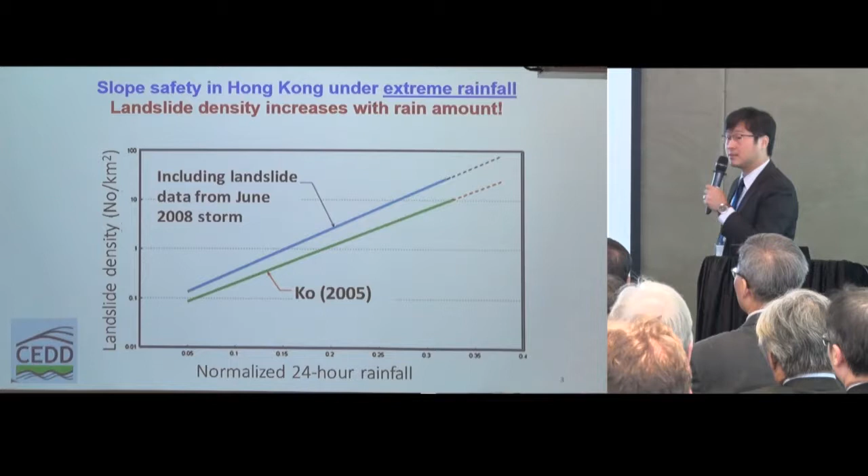So from the previous presentation from the climate researchers, we know rainfall is going to be increasing in the future. So what does that mean to us? Landslide density will be increasing. That's the statistics provided by our colleagues in the Geotechnical Engineering Office in CEDD. So that's the prediction. And we also have academics in HKUST doing the prediction of what happens under the climate change scenarios. And this is the western part of Hong Kong Island.

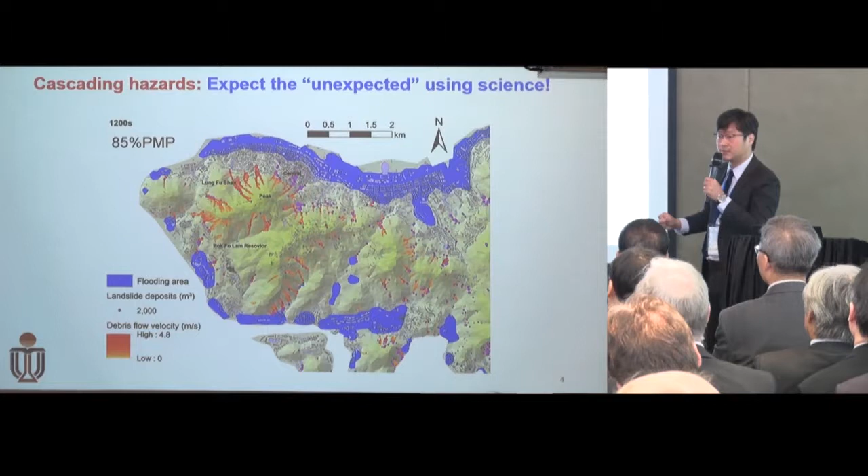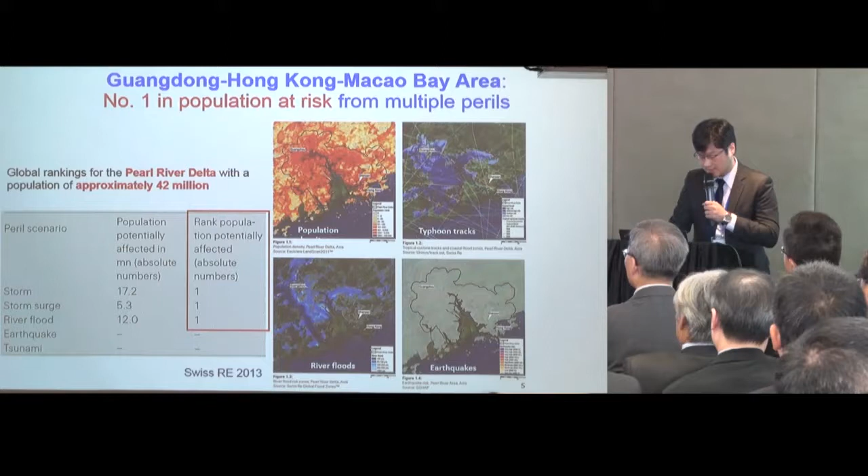As you can see, these little tails here are representing the debris flow events under some sort of climate change scenario. So we don't only have the landslide events, but also flooding. As you can see, the blue areas are the potential flooding areas in our future. So that is not only happening in Hong Kong, but also in the Guangdong, Hong Kong, Macau Bay Area. So from the statistics from our insurers, Swiss Re, they show that this is the #1 risk population in this area with storm surge, and also the flood. So that is not only happening in Hong Kong, but in the Greater Bay Area as well.

So we also have colleagues from the Drainage Services Department sharing their current technology in Hong Kong. So they have a very innovative approach. They are trying to build a sponge city, by building this kind of blue-green infrastructure to adapt to that kind of climate change future regarding flooding through different mechanisms, as you can see, okay?

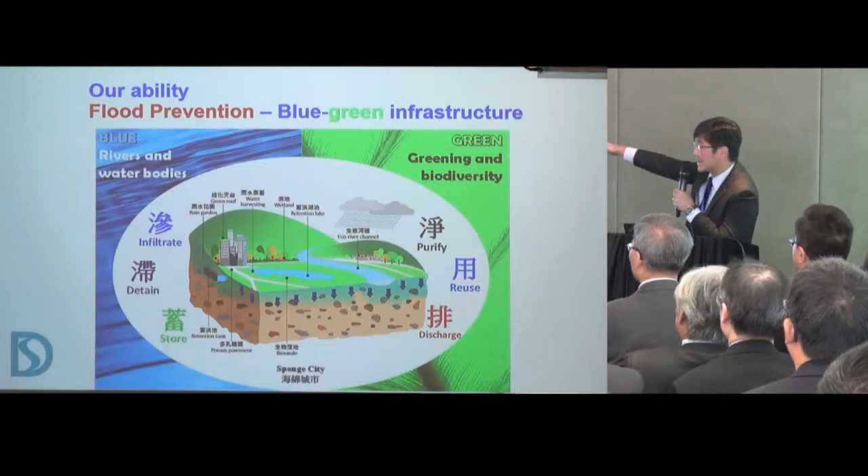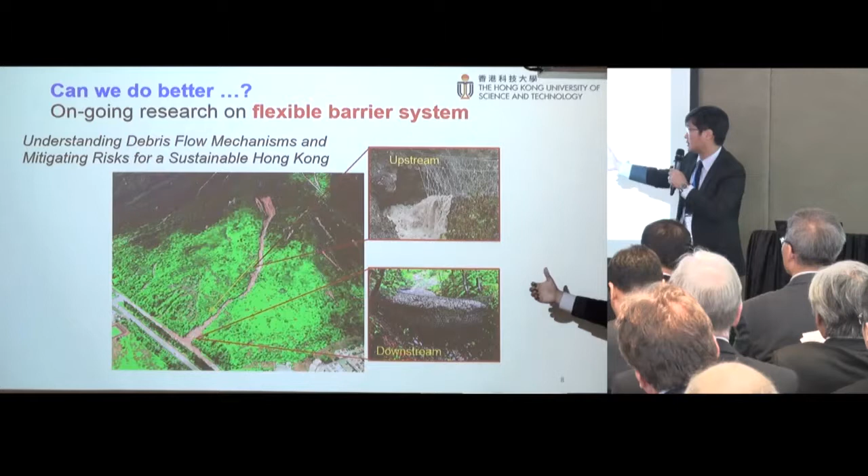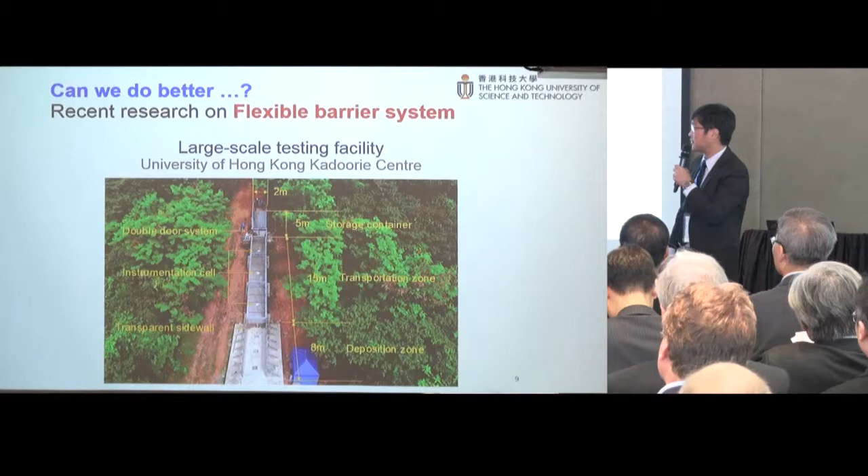So can we do better? Those are the existing technologies. So we have ongoing research on developing more adaptive infrastructure for landslides. So this is one technology, they call it a flexible barrier system. So basically it's steel wire to collect the debris. So the HKUST colleagues have built a long flume. By collaborating with the University of Hong Kong Kadoorie Centre, they built a around 30-meter long flume.

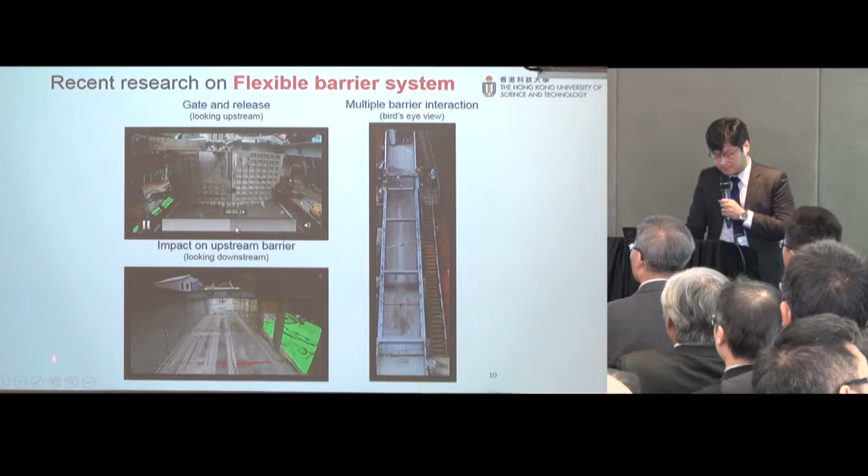So what they did is, here I show you some video. So that is a video looking upstream. So basically we collect the debris and then we open the gate, and then where is it? Okay, so no, not this one first. Look at that one. So debris coming down. So if you look downstream, you then see the debris going through. So you see the piling up of the debris because of the flexible barrier.

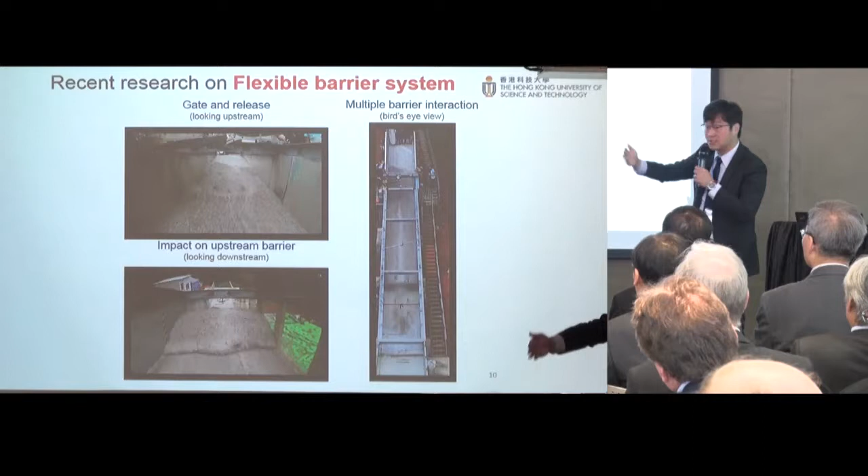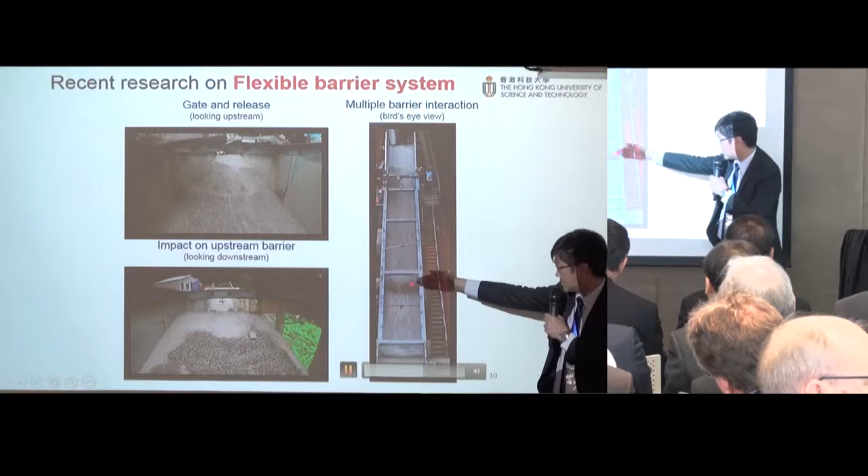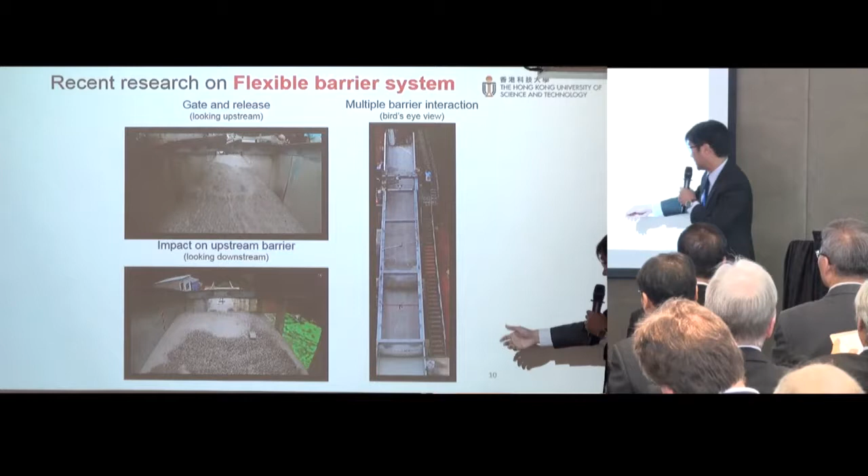And if you look at the right-hand side here, the debris is coming down, and we have one layer of flexible barrier, another one. So if you can see here, we are trying to minimize this runout distance, which is very important because in Hong Kong, we are very densely populated. The infrastructure is very close to hills. So if we can minimize this runout distance, then we can save lots of lives. So this barrier system seems to work quite well, and that's the recent research.

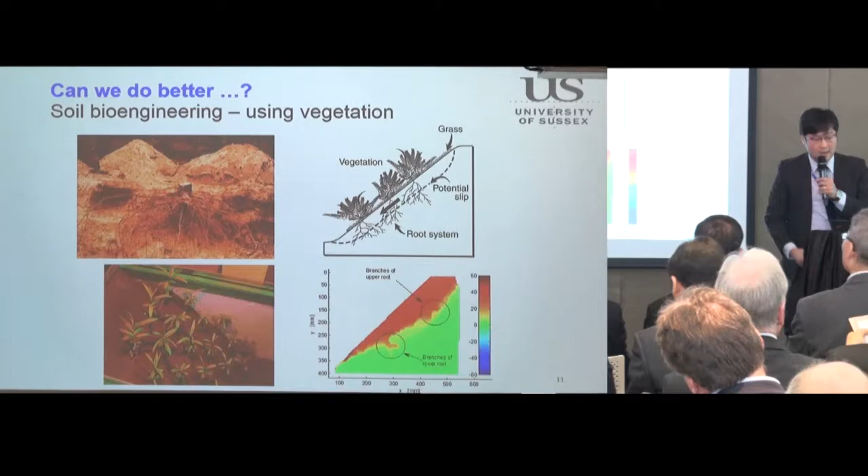And we also have speakers from overseas, in the UK in particular, from the University of Sussex, which is Professor Michael Davies' work, who is in the audience here. So he has a very innovative, ecologically friendly approach to stabilize slopes using vegetation. So these are the root systems. So why don't we utilize these roots as engineering materials or engineering structures to stabilize the slope? So this is one thing we could probably learn from overseas.

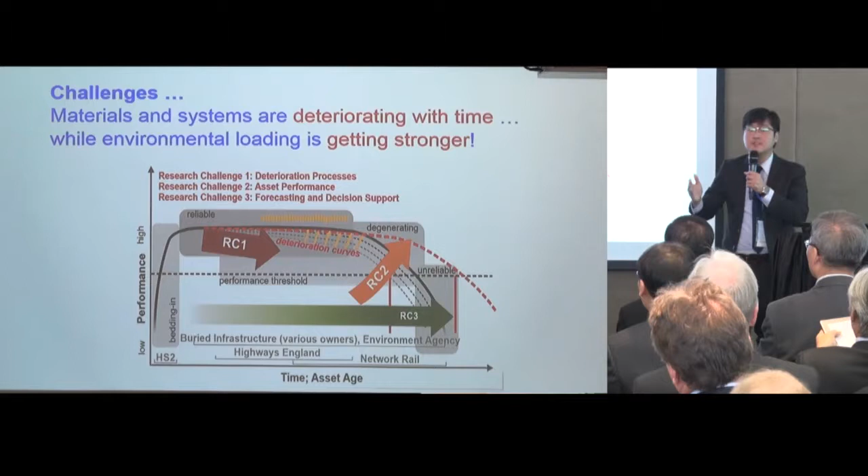So the challenge is that materials and systems are deteriorating with time. So even though we build something new today, the performance increases. But as time goes, perhaps due to environmental loading because of climate change, things deteriorate. Okay, so it may drop below the performance level. So what does that mean? So even if we build a very perfect system today, after 50 years the system may deteriorate, just like your photocopier in your office. If you utilize it a lot, it deteriorates, then you need to replace it. So what does that mean?

So for the increased rainfall, we have challenges. We need to improve our adaptive systems for this kind of event. So it's quite challenging in terms of research to predict where and when failure will happen with time. So this requires a lot of research in understanding the interaction between climate, soil, and possibly also vegetation. So it's cross-disciplinary research.